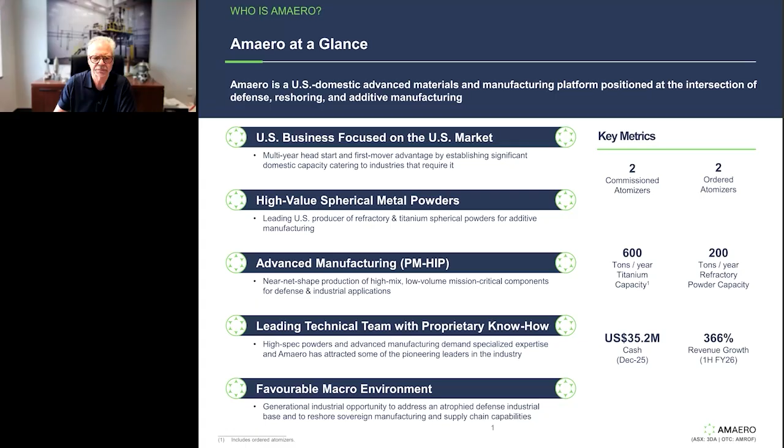As you will see, we have assembled a leading technical team in the US, have significant proprietary know-how, and again, have very favorable thematic tailwinds that are behind us. A bit about the overview of the business, again, both on the advanced materials side and the advanced manufacturing side. Advanced materials, as many of you may well know, 3D printing or additive manufacturing. The source, if you will, the feedstock is powder. Think of this as the ink cartridge in your HP printer. Again, the spherical powders are the cartridge, if you will, or the input that is used in additive manufacture or 3D printing.

About 80% of that powder market is what we would think of as commodity alloys, stainless steel, nickels, coppers, such as that. The top 20% of the market, lower volume, higher value, are refractory alloys, such as niobium, tungsten, tantalum, moly, zirconium, and then titanium. Titanium being the largest part of that market. That is exclusively where Amaero focuses. We have the most advanced technology in the world, the next generation of an EIGA, or electrode induction gas atomizer. We have what's called the EIGA Premium. Significantly higher yield than the prior generation, uses less argon gas, which is the second largest consumable. And again, very, very high quality powder.

The two most accepted manners of atomization are plasma atomization, used by companies such as AP&C and Tekna, and gas atomization, used by companies such as Amaero and the prior generation ATI in the US. These additive manufacturing or 3D printing applications are used extensively in defense, space, medical, and other industrial end markets. The other side of our business, and again, quite unique in that we're both a material business and a manufacturing business, is powder metallurgy, hot isostatic press, or PM HIP manufacturing of near net shape parts. This is particularly important in the aftermath of the Ukraine war, in that we have got a significant challenge with large castings and large forging supply chain in the US.

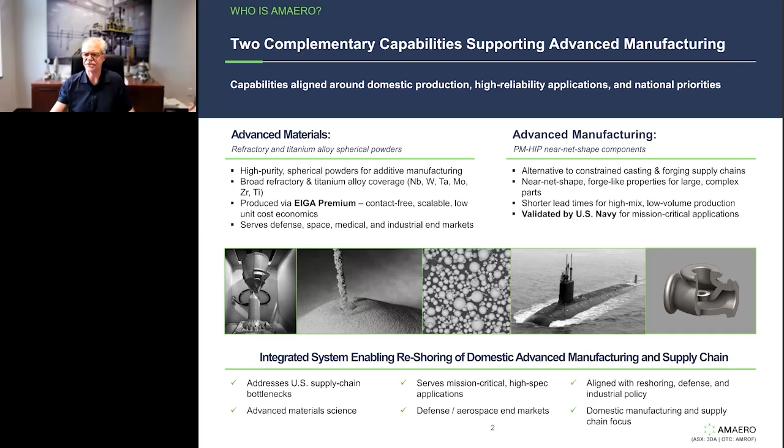PM HIP manufacturing has been used for about 70 years. It is one of the very few technologies that has a sufficient maturity that can be immediately inserted. We've worked very closely with the US Navy. You'll see in a bit validation of that via a letter from the US Navy, as well as an event that was convened at Amaero back in December. And PM HIP is particularly well suited for what we call high mix, low volume production. So if you've got a single part of which 1,000 will be manufactured, it makes sense to invest in investment tooling and so forth. But if you've got a part of which you might only need a dozen parts in a single year, but again, mission critical, high value parts, PM HIP is fantastic for that type of application. Very interesting leadership team.

One of the things that is unique about Amaero: I'm an engineer by background. I've spent my entire career in private equity and finance. My private equity firm Pegasus owns about 30% of Amaero. I have personally funded about half of that position. Again, very unique alignment of interest with our other shareholders.

We own 288 million shares of Amaero. Every single share of that stock was paid for alongside other investors in placements or on-market or off-market activity. Very different than, candidly, what I see with many ASX companies where CEOs or management are given significant stock in the way of performance rights or other grants. Again, in this case, all of our shares were paid for alongside other investors.

We've assembled the leading technical team in the US. That's the reason we work so closely with US labs and other defense primes and counterparts in the US. As I mentioned, we're now in a fully built out 100,000 square foot facility near Chattanooga. We fully commissioned our equipment, and just this year we have begun scaling from a commercial standpoint. I'll move somewhat quickly through these early slides, and then towards the back of the presentation focus a bit more on the business in its current state, growth opportunities, and a business update.

One of the important things about Amaero is we're almost 3 years into, it'll be June of this year, a 3-year capital investment plan. That was $72 million Australian, or about $56 million US. We will complete that plan June of this year. In doing so, we will have fully commissioned at that point 3 EIGAs. Today we've commissioned 2. A third one will be commissioned in June.

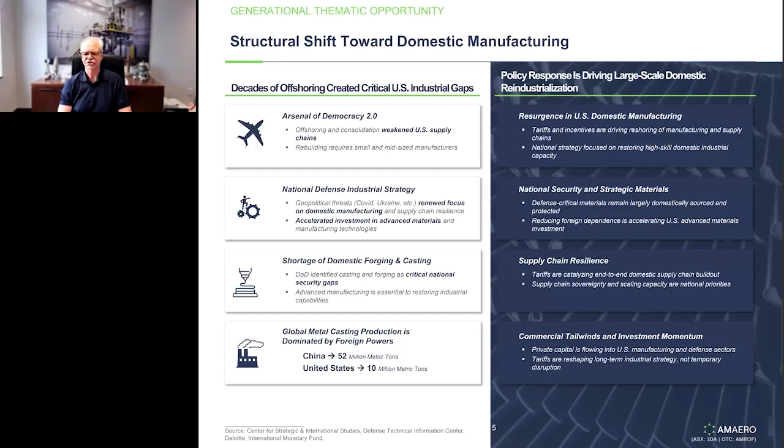You've seen in the news, obviously, companies such as Apple, NVIDIA, the chip manufacturers, medical companies, and so forth, that are trying to better align their manufacturing footprint and their supply chain footprint with their end market, the end market being primarily focused in the US. This is driving significant interest by large multinational companies, particularly US-based multinationals, that are bringing that manufacturing and supply chain back home. And this has been a significant tailwind for Amaero.

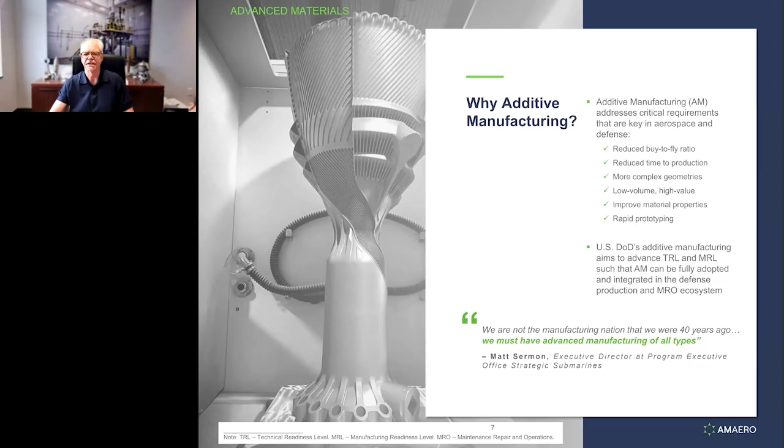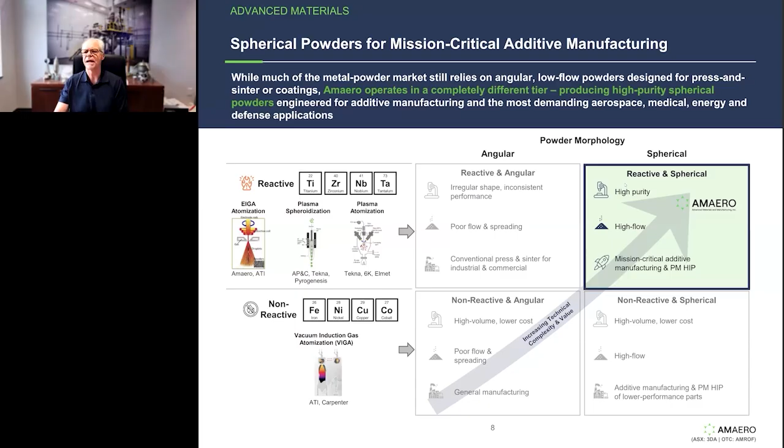Again, very important. Where we sit, as I described before, is we are spherical powder as opposed to lower value angular powder, an important distinction. And again, we are dealing with reactive metals such as the refractory and the titanium metals, as opposed to the more commodity non-reactive side. So again, spherical powder, reactive powder, highest value within the powder supply chain.

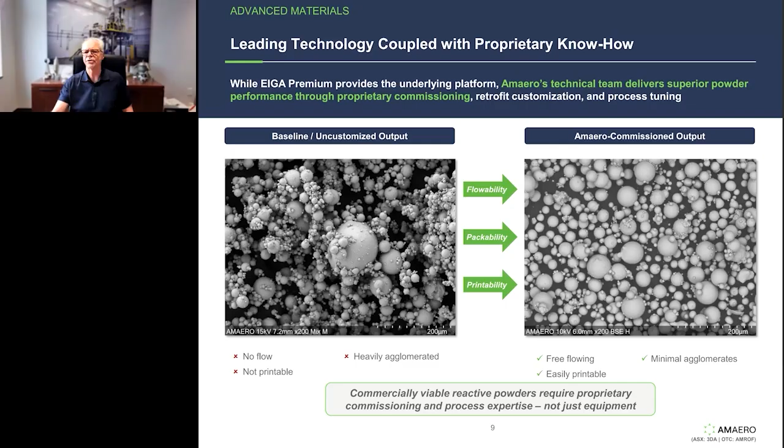As I mentioned, Fred Yolton, who invented gas atomization of titanium 35 years ago, and Eric Bono, who's worked with him for 30 years. So very significant proprietary know-how on our team. The same is true on PM-HIP manufacturing, where our team has done a lot of the key pioneering work over the last 2 decades. On the PM-HIP side, the real challenge that we have now is in forgings and castings.

Matt Sermon, who I mentioned again is quoted on the bottom of this page, one of his favorite charts is a chart that shows the lower 48 of the US, and it's aligned with 48 nodes. His point is, my average part for the Navy takes me 28 months to manufacture. 19 of those months it's waiting in queue, and it's traveling 48 places in the US for various processes. We've got to find a way to shorten that production process.

PM-HIP, again, you'll see a letter here momentarily from the Navy, is one of the only mature technologies that can be immediately inserted, and that we can qualify parts for nuclear submarines with this technology. So again, a significant advancement there. These are very, very large parts, far too large to be printed, by way of example. And so you're talking about parts that are 5 tons, 10 tons. Again, much, much larger parts.

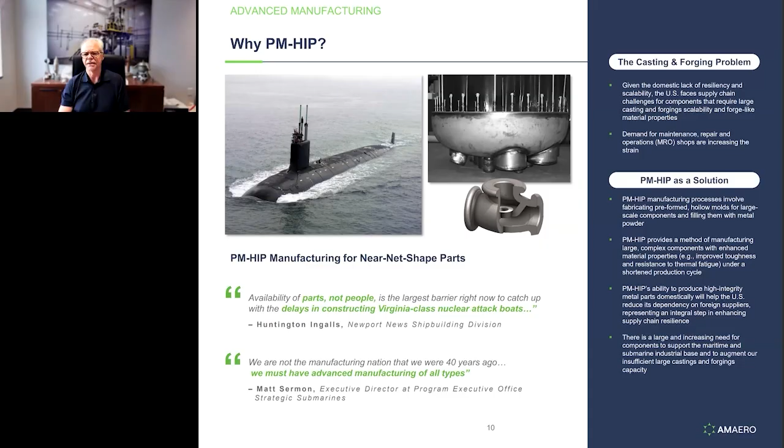And you can think about various industries, whether it is the maritime industry, whether it is nuclear energy. Obviously, nuclear energy is very important in the US. We all talk about AI. AI is driving these data centers. Data centers require a lot of energy. And so you're seeing nuclear modular reactors and other things being advanced in the US. And again, PM-HIP is a great technology for that.

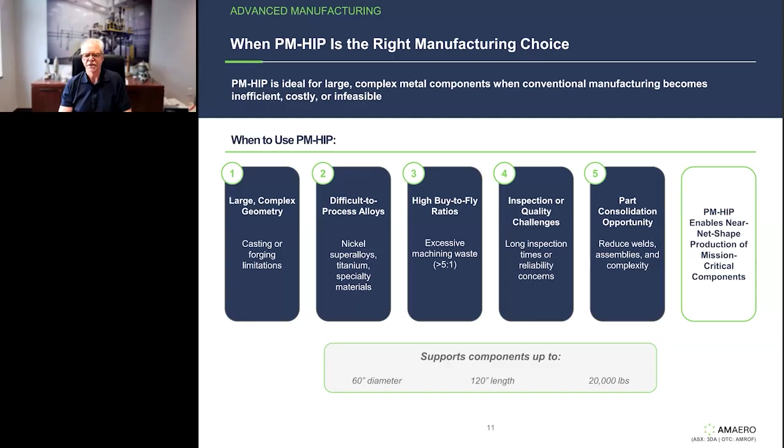In particular for PM-HIP, where it's the right choice is where you have very long lead times for forgings. You do get material properties that are forging-like, so much higher material properties than castings. Again, large parts where you typically would have excessive machine waste. So these are ideal parts for PM-HIP. And as I said, these can be very, very large, commonly 10 tons, and very large in size, up to about 60 inches in diameter.

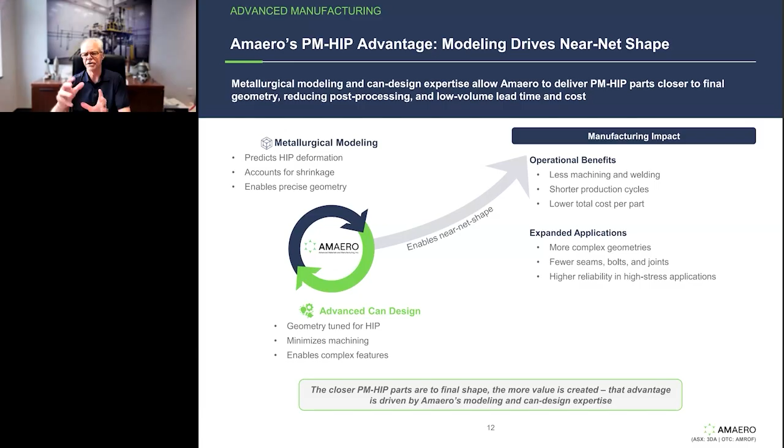This gives you a sense of where we sit. We've got proprietary know-how from the very beginning. So a very advanced numerical model that is used to design the can or the canister, essentially the mold. These molds are then filled with powder, outgassed. We then send these away to be HIPed, hot isostatic pressed. So you're putting this under very high temperature, very high pressure. And then in turn, with the near net shape, you've got final machining that is done to get to the end part.

Validation on the PM-HIP side, again, we have leading pioneering experience on our team. I would expect over time about 60% of our business will be on the material or the powder side of our business, but a significant portion, about 40% of our business, will be the manufacturing side of our business. So quite unique. You think about other ASX companies, they tend to either be materials or machining, that is manufacturing. Again, we've got this very unique capability in both, and yet they're highly related and synergistic.

Talked about the know-how on our team. We were essentially in stealth mode, working with the U.S. Navy for about 18 months on an active collaboration. We finished that project October of last year. Significant acceptance of that. And by the way, other companies had not been successful achieving those parameters that had been established by the U.S. Navy.

In turn, the U.S. Navy convened a meeting in early December at Amaero. That meeting included the two shipbuilders, NAVSEA, Naval Reactors, Naval Nuclear Labs, BPMI, which is the prime contractor for all things nuclear.

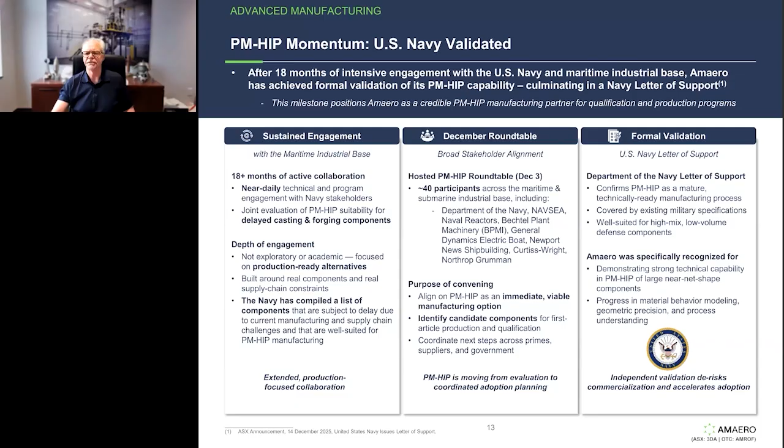Shortly thereafter, the U.S. Navy, highly unusual, issued a letter supporting PMHIP as a mature technology that can address the challenges that we have in the forgings and castings ecosystem, endorsing Amaero and the work we've done in our technical proficiency, and encouraging us to identify parts that can be moved towards qualification, further relieving the challenges in the forgings and castings ecosystem.

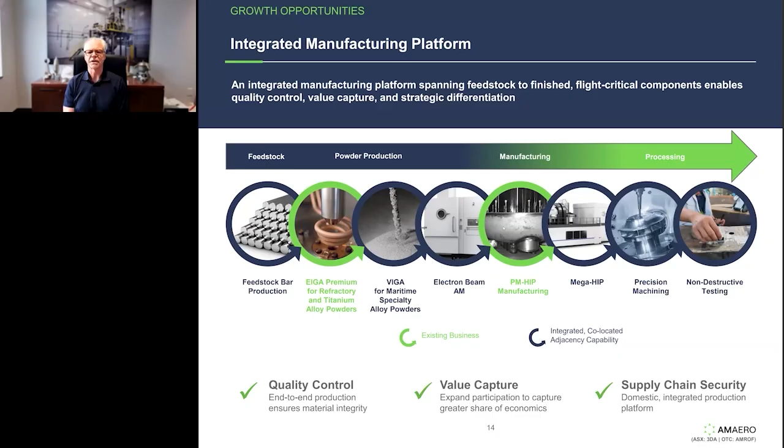Gives you a sense of where we sit today. Today, our primary capabilities are producing refractory and titanium powder and PMHIP manufacturing. Over time, what you'd expect is we'll look at expanding our business to include adjacency capabilities, back to the challenge the Navy has identified, as these parts travel all over the country. So we've got a real opportunity to continue to build out a more integrated capability at Amaero.

I talked earlier about some of the important long-term strategic agreements we have with ADDMAN, Castheon being at the forefront of work done with Dr. Youping Gao on printing not only C103, but other very high value refractory alloys. Think about niobium alloys used in high temperature applications such as hypersonic weapons and strategic missiles. Think about tungsten used in munitions, zirconium used in nuclear applications, moly, and other high temperature applications. So really interesting if you think about the thematic opportunities in hypersonic weapons and strategic missiles. Think about space applications too, again very high temperature.

In the case of Velo3D, as I mentioned, the only made-in-USA equipment OEM for 3D printing, we have a 5-year exclusive relationship there on the refractory and titanium powder side.

Titomic, a leader in cold spray, some very interesting applications as they move to advance not only from repair and maintenance, but qualifying parts. Some of the interesting opportunities include titanium pressure vessels, as well as using refractory alloys on thermal protection systems. To qualify those parts, the defense primes are requiring spherical powder. So again, a very interesting exclusive supply agreement there.